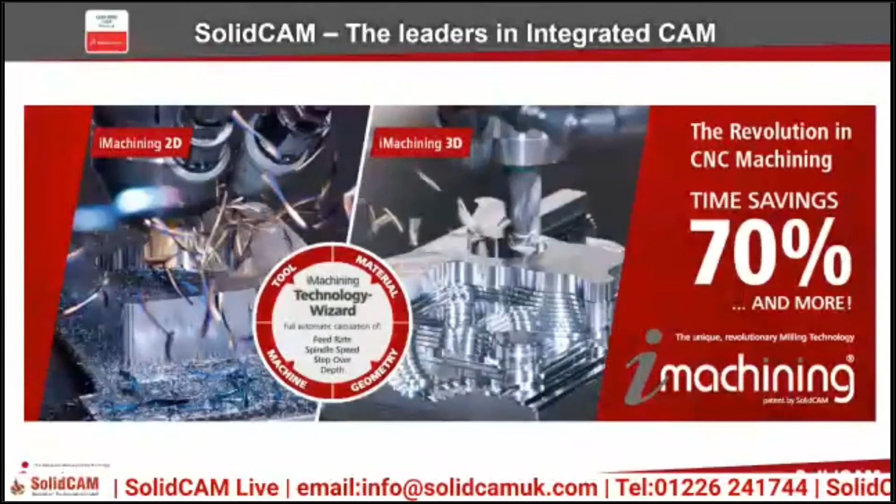So we're first going to have a look at a presentation of SolidCAM. We're going to have a look at the features and benefits of SolidCAM, and we're also going to have a demonstration inside the software as well of the part that's been programmed for today's seminar, how it's been programmed, and then we will cut back to the cameras in the machine to have a look at this being cut live.

So SolidCAM are leaders in integrated CAM. The major benefits of using SolidCAM inside SolidWorks are that we have the same look and feel through a seamless single window integration. There is full associativity inside SolidWorks as well. So any model changes that are made will automatically update the toolpaths in SolidCAM. SolidCAM is working inside the SolidWorks assembly mode to define fixtures, tooling and vices, and we've also been gold partners with SolidWorks for the last 17 years.

We have a complete integrated solution inside SolidWorks. We are a modular system, so we can add the specific modules needed and when needed as well. So you don't have to have all the modules all at once. If you buy a new machine and need extra modules, these can be plugged in afterwards.

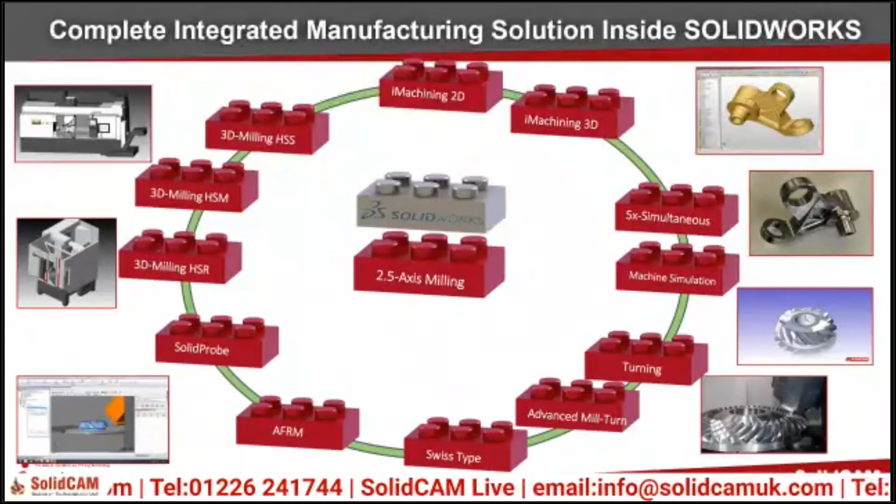Moving on to our iMachining module. So this is our high-speed roughing operation inside SolidCAM with a technology wizard built in as well. So we get increased productivity due to shorter cycle times, up to 70% and more cycle time saving. We dramatically increase the tool life and unmatched hard material machining as well.

We see outstanding performance when using small tools, and we can use iMachining on 4-axis machines, 5-axis machines, mill turn machines as well. High programming productivity and a very short learning curve. The unique wizard will optimize the feeds and speeds for you, including the depth of cut based on the stock and the tool material, as well as the machine specifications. So this takes the headache out of programming these high-speed roughing operations.

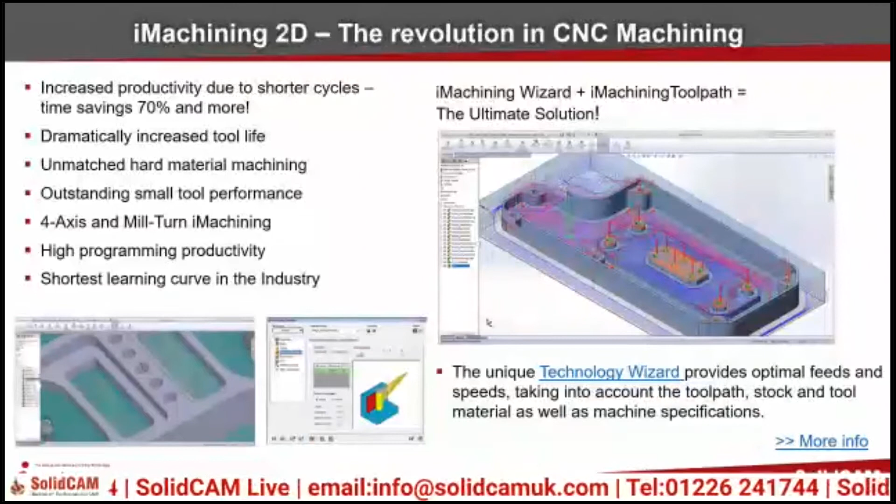So iMachining comes in 2 stages, all built into the same operation. The first stage of iMachining is to create an intelligent toolpath, so an efficient tangential toolpath, which will ensure constant tool load on the machine.

And then the second part of iMachining is the technology wizard. This will calculate the cutting conditions for any given machining operation. So this will calculate things like the speed, the feed, the depth of cut, and also the cutting angles. So we can have variable cutting angles.

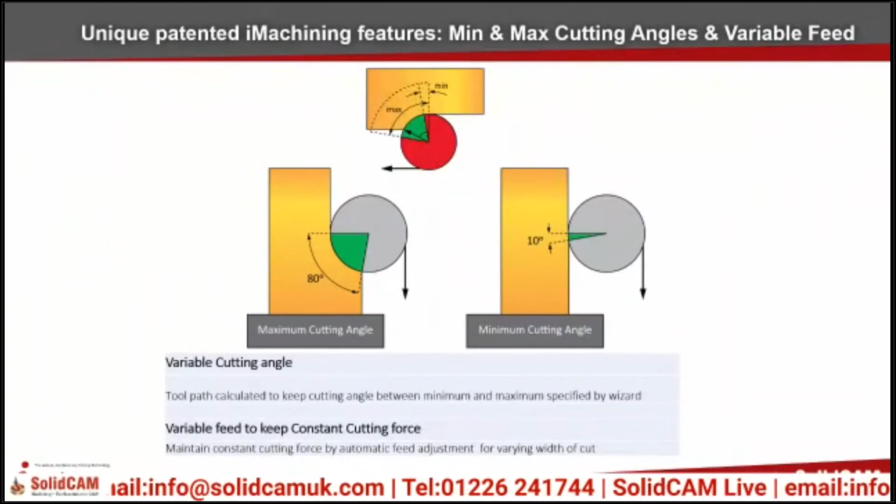You can see there from 80 degrees to 10 degrees, we can set the maximum and minimum cutting angles based on what we wish to achieve, or we can let the wizard handle those maximum and minimum based on the material parameters that it's been given.

Also, the patented unique features inside iMachining are we have the morphing spirals only in iMachining, as you can see there on the left, so with varying width of cut. And on the right-hand side, we have intelligent separation as well for iMachining. So we can separate areas with channels to maximize the spiral area.

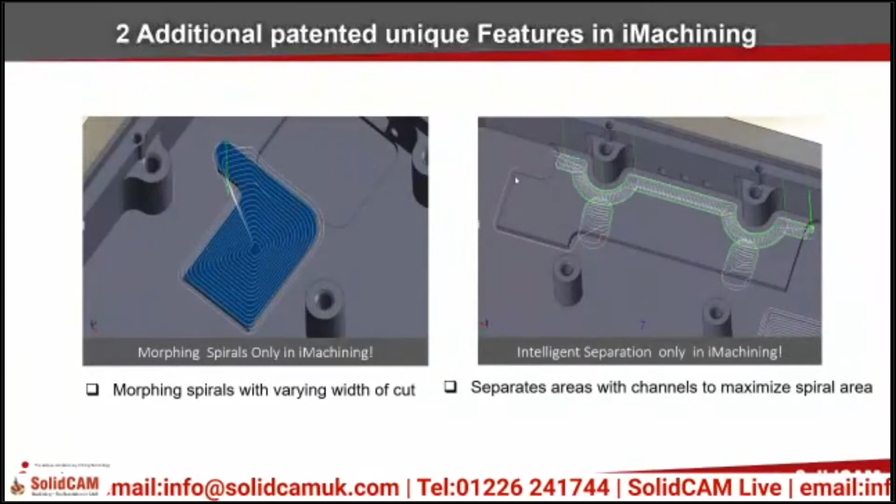So optimal speeds and feeds for iMachining. So the technology wizard will calculate these speeds and feeds for you based on data that we have initially entered. So we would enter the material properties. We obviously select the geometry that we want to machine. We have the tool geometries and we put in the machine parameters.

Now the depth of cut is calculated inside iMachining, and it is calculated on an optimal depth of cut to reduce vibration. We're looking for an ACP close to a whole number. Now, if you look on the left-hand side here, ACP 1, that is one full engagement with the tool. This is minimal vibration. If we look on the right-hand side here, we have many contact points, and we have an ACP of 4.5 as we hit the top, so we have a gap.

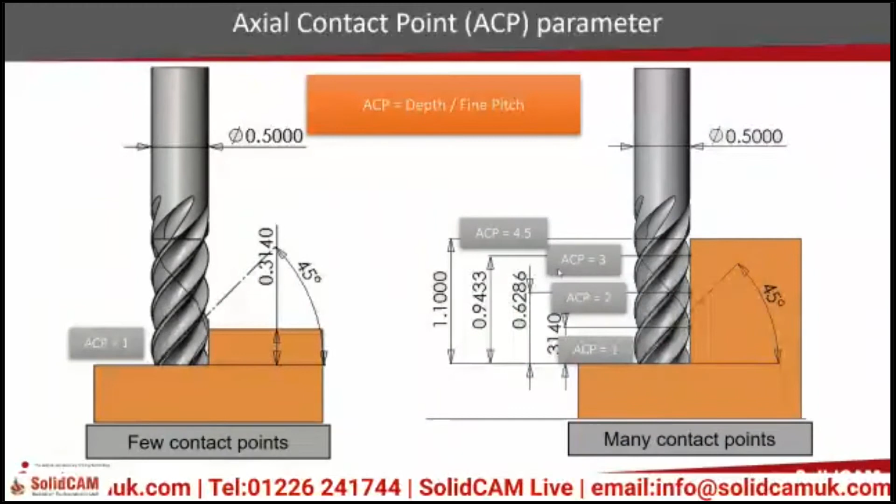Now, this will produce vibration based on the fact that the tool has load and there is a flex point at the top here. With this one here, we're in full contact on the left-hand side here. Now, the cutting forces are only in one direction, to the left. On here, an ACP of 3 would be fine as well. So we're looking for an ACP as close to a whole number as we can. And again, iMachining will calculate this for us.

iMachining is a patented technology. No other system can use our technology. You may see other systems using the spiral or morphing toolpaths, but you won't see any system using a spiral toolpath and also calculating the speeds and feeds and depths of cut using our technology.

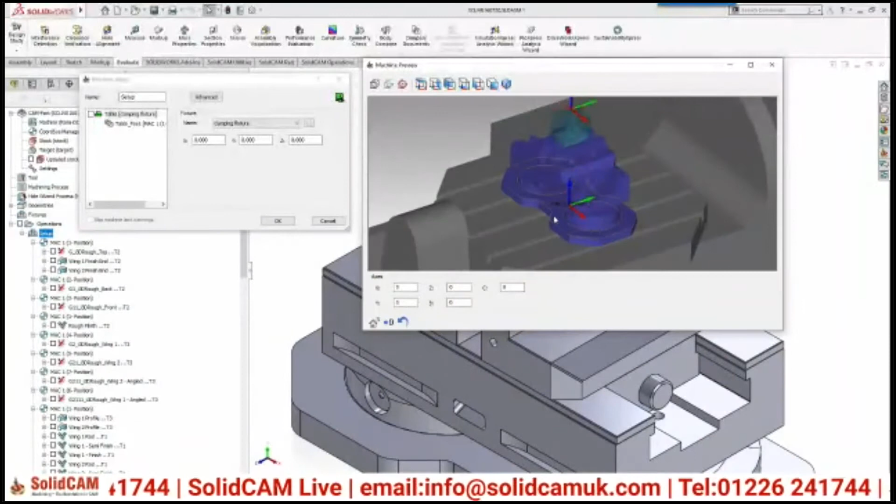So let's have a look at a demonstration of the component that we're actually cutting live on the machine today. So this is the component. As you can see here, this is our setup. And we can see that the component is set up in the vise on the ROMI DCM 620. And we've got the stock in there as well as the part.

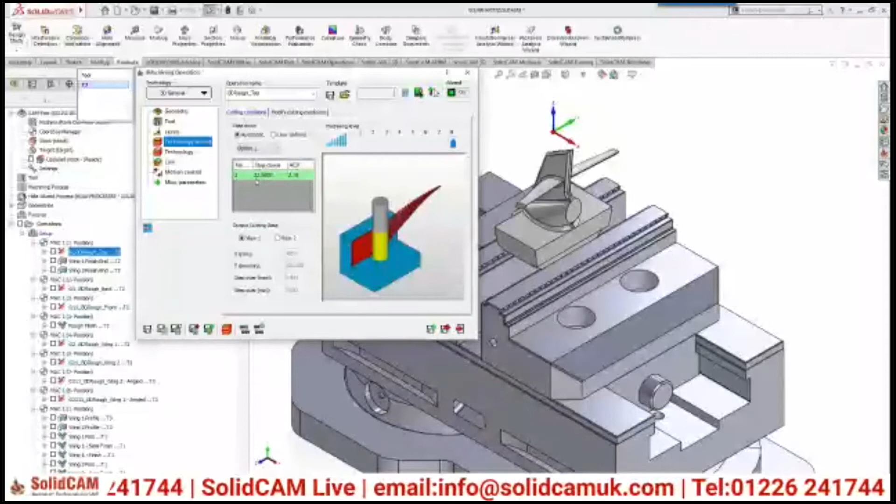And on the iMachining data, we have told it that we're cutting EN24T. This is a premium carbide and the helix angle is 36.5. Now, if we have a look at the technology wizard, this is the ACP here. You can see how it's highlighted in green. So we have an ACP of 2.19, which will minimize vibration.

You can see here the speed, so the meters a minute, we're running at 183. And we can also see that in the feed rate as well. So the maximum feed rate of this toolpath is going to be 5,261 with a step over of 0.5.

Now, the machining level can be adjusted depending on the rigidity of your setup and the application that you're using iMachining for. You can see as we slide the bar for the aggressiveness that the speed and feed will change in tandem.

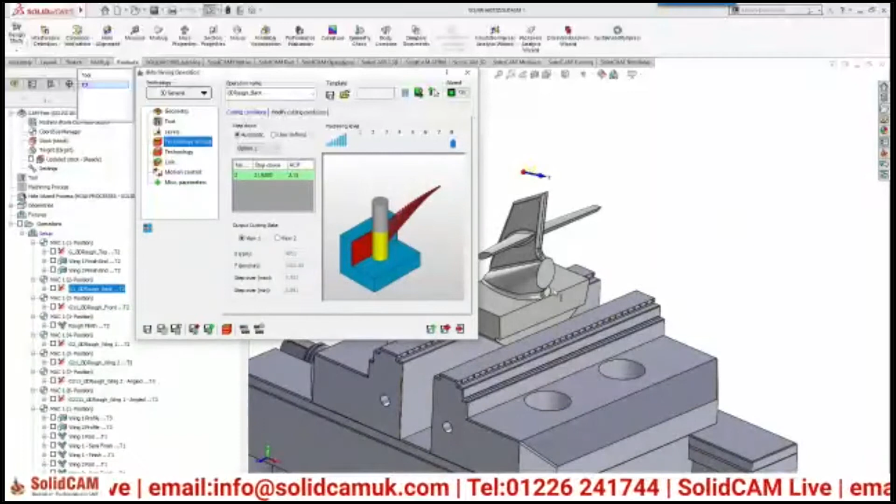This is the tool path. So this tool is roughing halfway down the component. So to minimize the tool stick out, we've got the 5-axis machine. So we're roughing halfway down and then we will tip over and rough the rest at an angle. Those two operations there are just finishing the ends of the wings just while we've got the rigidity in the component and to stop the vibration.

So this is the second iMachining toolpath. You can see this is done from nearly 90 degrees. It's about an 85-degree angle. Again, the ACP is 2.15, so we're in the green. The technology wizard will tell you if you're going to get vibration. You will go into the orange area, which means that there is likely going to be vibration. And then we'll move into the red, where we will get vibration.

As you saw in the presentation, we're using varying cutting angles, which will vary the speed and feed. You can see here that automatically the angles have been selected, which means the required power at the motor is 2.2 kilowatts. Now, if I change the max cutting angle to 20 degrees, for instance, you can see the power required at the motor is now 1.8 and the feed rate has adjusted. So the maximum feed rate has gone up, but the step over has come down.

So again, I'm going to unselect that and leave that as it was and let the technology wizard pick the best suitable cutting angle for this tool.

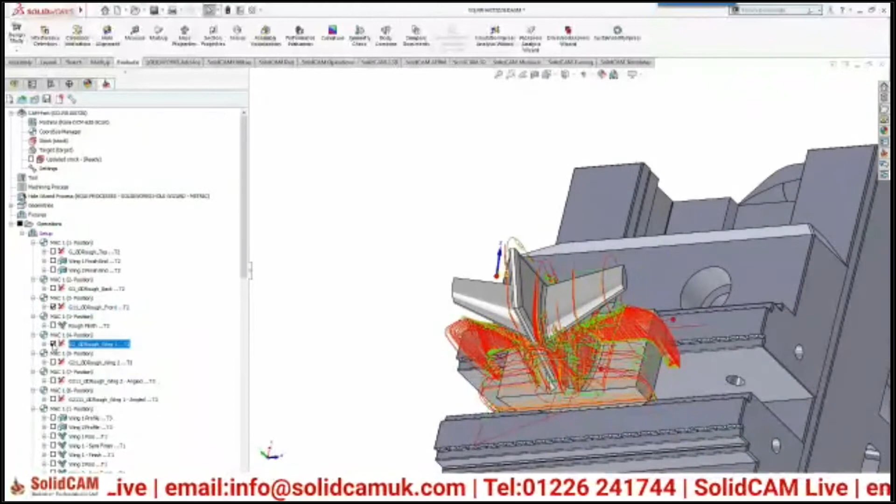Now if we have a look at the next operation, so the next operation is then from the other angle, and then the other four, should I say, iMachining operations are with the 8mm bullnose end mill from ITC. So again, all the iMachining data has been selected.

We're also using a scallop at this point here, so we're rest roughing as well. So we're going full depth of cut with iMachining, and then we're asking it to go back over the component, leaving a 1mm scallop all over in order to give us a rough shape ready for finishing. So you can see those 4 toolpaths on there.

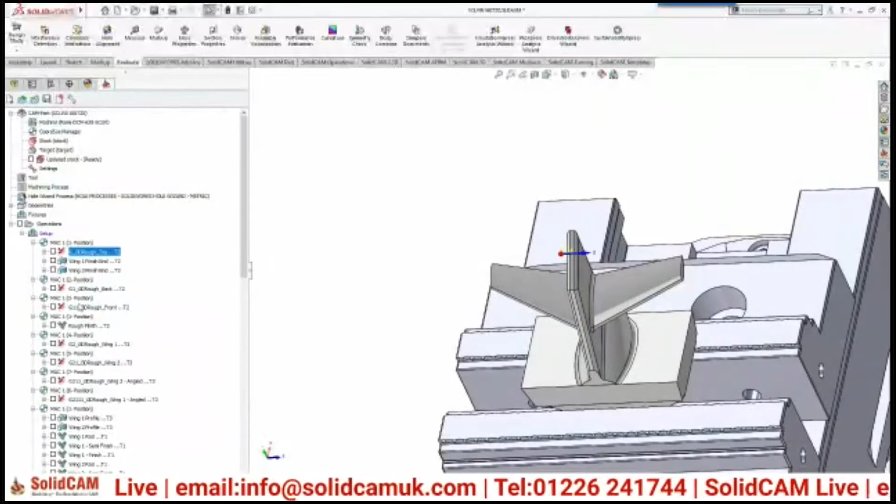I also want to show you the next toolpath as well, which is not a roughing toolpath, but I'm using it to rough the bottom shape of this component out. So I've actually used a 5-axis simultaneous operation here to rough this plinth using the radius on the side of that 12mm cutter. So I've selected these 4 faces around the component to machine using parallel cuts, and I've told it a drive surface offset of 0.25.

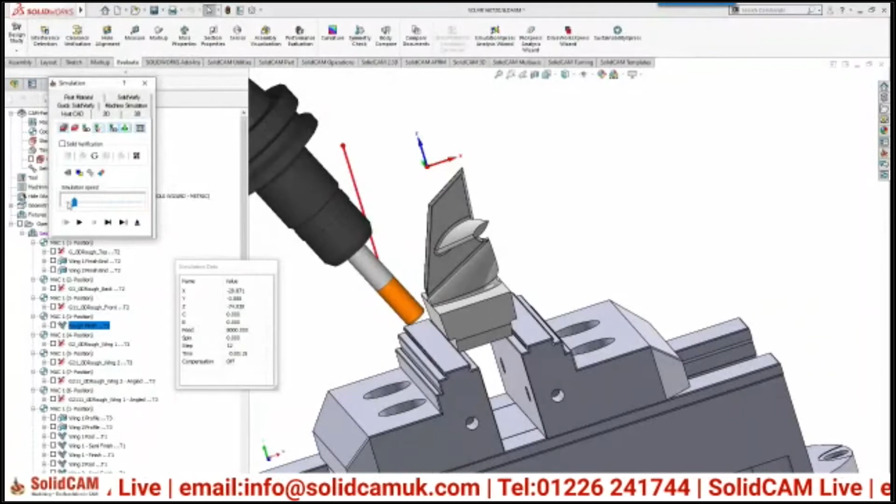If I go and have a look at the strategy, you can see I've selected it to be output in 4-axis mode only, and I've locked the 5th axis at 65 degrees. So I've actually locked the B axis over at 65 degrees, and then we're going to rotate the C axis around. So you can see there, this is the angle of the cutter. So I'm getting contact on the radius here, and I'm just taking cuts all the way around here to rough that to within 0.25, ready for finishing.

So that's just to show you there that there's always more than one way to rough an area on a component. So if we have a look at the simulation here, you can see the live cutting of this job as well. So you can see the simulation shows us what we're cutting on the machine. Now this is iMachining, this is that top component there. Now this is full speed as well, this has not been sped up.

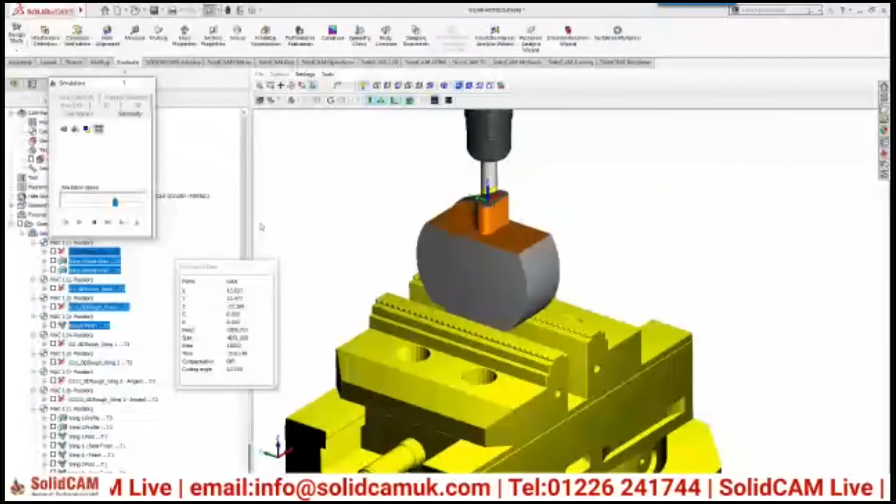The simulation obviously is a little faster than the actual machine cutting, but we can see here it's machining away all of that material. It's using the full flute length, so we're at about 22mm depth of cut here. And what you'll see next as well is the scallop that we put on there. So I told it to leave a 1mm scallop, so you can see it's done all its full depth of cut first, maximizing that tool efficiency, and then it's gone back over the component to do its 1mm depth of

cut. And you can see on the left hand side here it's in cut, iMachining. So again, full depth of cut now on this second cut. You can see it actually working there on the machine, and the simulation's moved on to the other side. It's a little bit in front there.

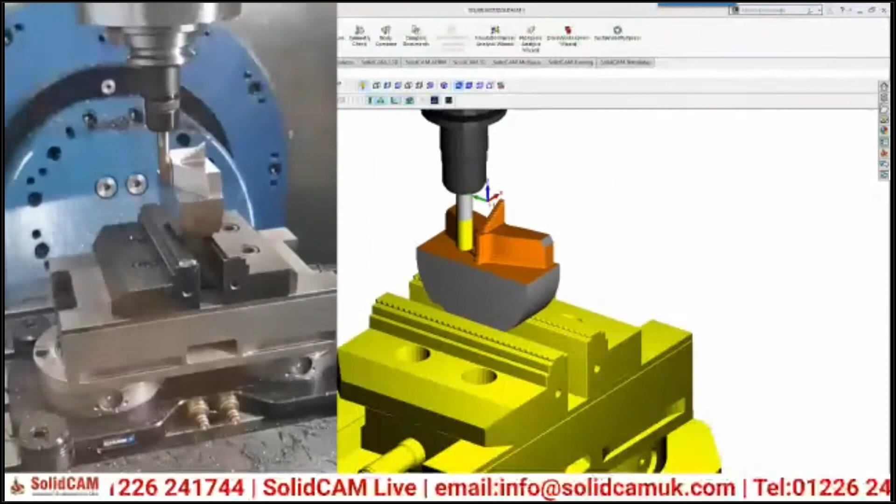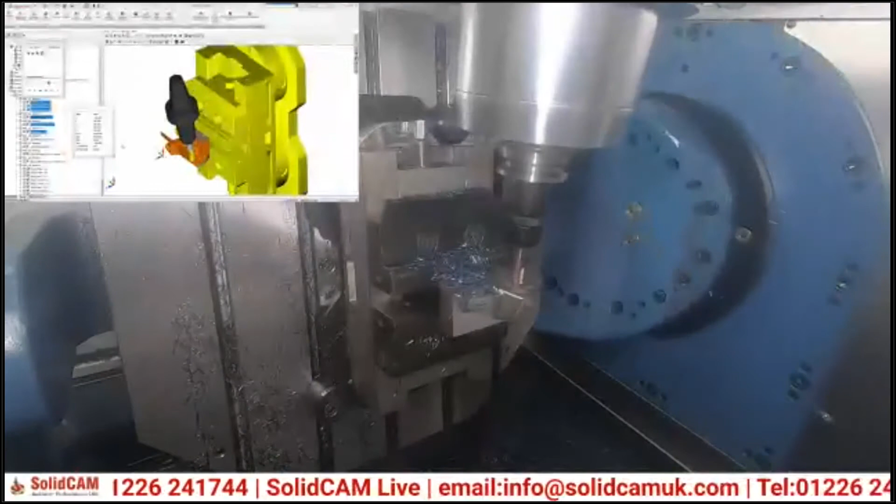If we have a look at a little bit of slow motion here on that back side of that component, you can see iMachining there, peeling the material away. So this is a small step over, high speed and feed with a full depth of cut. And this is now tipped over, so we're roughing out underneath those wings of this component. You can see we're still using the iMachining technology to rough that area out.

You can see here, this is the plinth roughing here. So this is where we used the 5-axis simultaneous to actually produce a roughing cut. So 5-axis can be used for roughing just as well as it can be used for any finishing cuts as well. What we're going to do is we're going to come back to the machine now and go back to the live demonstration, and you'll be able to see this cutting live as it is doing here in this recording.

Yeah, so as you can see in the presentation, it's running all that iMachining there. You can see the live video feed now. You should be able to see that on your screens. You can see it's doing that roughing around that plinth as I showed you with that 5-axis operation. So we've done all the work with the 12mm tool there, roughing out all of that area.

We've had a couple of questions come in as well throughout that presentation. One was, is iMachining beneficial on aluminium? Yes, it is. It's beneficial on any material that you use. So you get greater time savings on a harder material such as titanium, but you still see savings on aluminium as well.

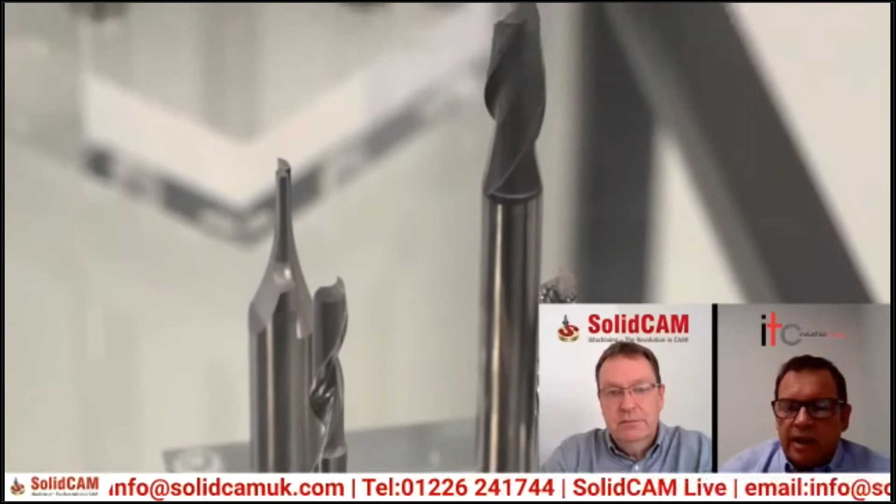Obviously, we decided what size cutters we're going to use, but you've told us what the tools need to be geometry-wise. Can you tell us why you chose those particular tools? Yeah, obviously we've been deciding what methods he was going to use on the live demo, barrel cutting and the trochoidal. I went for the 5021 series, which is predominantly designed for trochoidal milling anyway. We've got a full range of tools that we developed for that. This particular tool is 5 flutes, variable helix, variable pitch, and a coating on. So it's designed specifically for doing that type of milling.

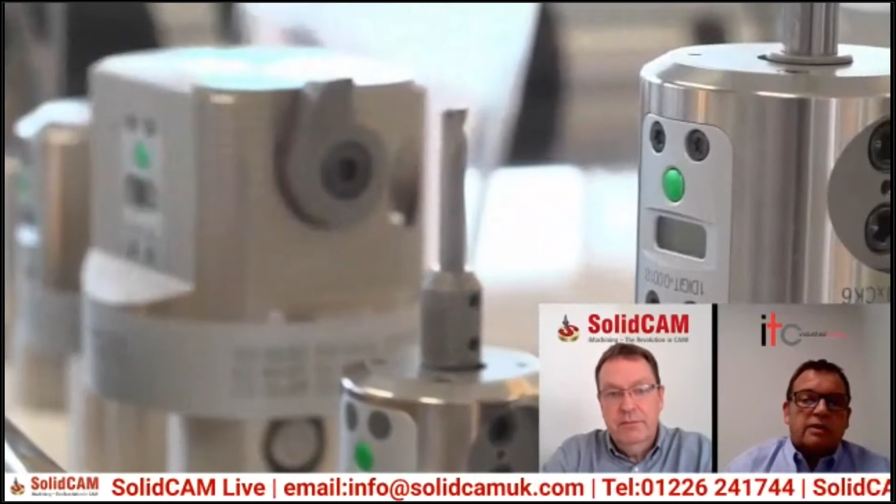Also, we've got another range with chip breakers in now as well, specifically designed for getting rid of swarf where you're using full flute. Got you. And then obviously we've supplied the back end tooling as well. Yeah. So this is a very important part of it when we need to make sure the tooling's running very true. So that's why we've gone with those particular tools. The barrel tool was designed predominantly by Ben, relating to the shape of the part. So then we've gone with that drawing and manufactured that to suit. So that's it really.

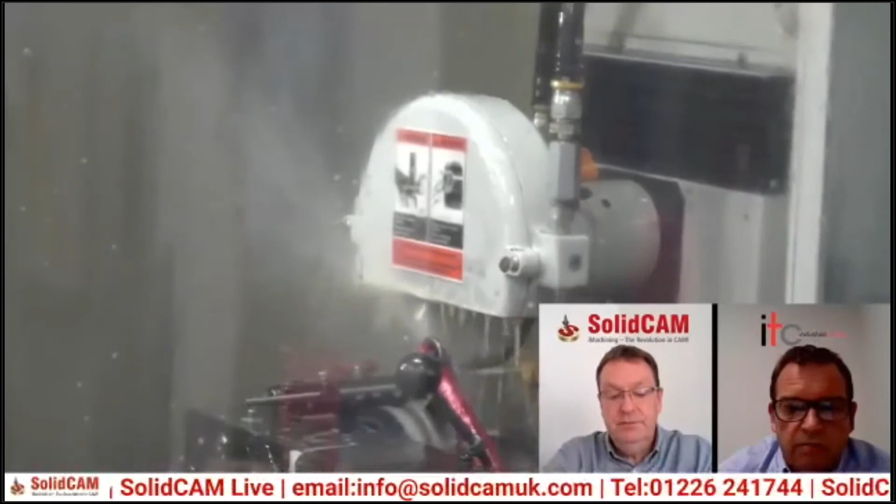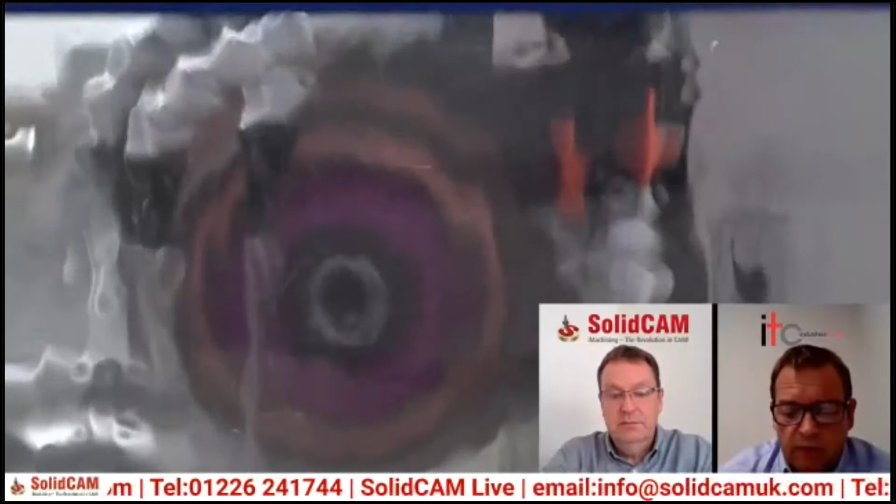We've got new blanking machines that have enabled us to cut out the pinch points in manufacturing. Also, we've got a new diamond wheel grinding and balancing machine, which has obviously cut our times down and saved us costs on the wheels, increased the wheel life for us as well. So those are some of the improvements we've made, along with replacing the older machines with new ones and new

technology. And we've recently just released a new app, which is available on Android and iPhone, which enables customers now to purchase direct from the app. Right. So yeah, we're trying to keep up with everything.

You know? Yeah. I mean, obviously, we believe SolidCAM is one of the best CAM software solutions out there, and we could have used, you know, numerous solid carbide providers. Why do you think we should have chosen ITC? Well, I think the thing about ITC is we're a solution-based company, not just a manufacturer. We've got engineers, sales engineers that work all over the country, and they're all from a shop floor background. So they're all capable of standing with the operators on the machines and doing the job.

And that's a big part of it. You know, it's all about the solution as well. And we've also got a team in the office that can answer questions, technical questions as well. So one of the biggest parts of it is obviously making sure that you can cut time out of the job, because it's not just about the price of the carbide.

You need to be able to offer a solution where you need to be able to look at what the customer's doing and how he's using that tool, the methods, the whole package, rather than just saying, look, it is an end mill, because that's the whole point of it. We've got to be able to reduce those costs, and it's not just by the tool, it's by the methods and offering a solution.

You mentioned it previously about the importance of tool holders. Can you just explain that a little bit further for us? Yeah, the tool holder side of it is a very big part of the whole package. You've obviously got a very expensive machine, really good quality tools, and you want to put the interface between them in the middle of it and make it work really, really well. Yeah. Now, there's a lot of cheap stuff on the market.

You know, there's a place for everything, but some of the cheaper end collets will have a 15 micron runout, and that makes the tool oscillate rather than run on its center, which has an effect on each flute cutting properly on the job, and that affects tool life, surface finish, vibration, everything. So if you put a good back end quality tool in there, like the

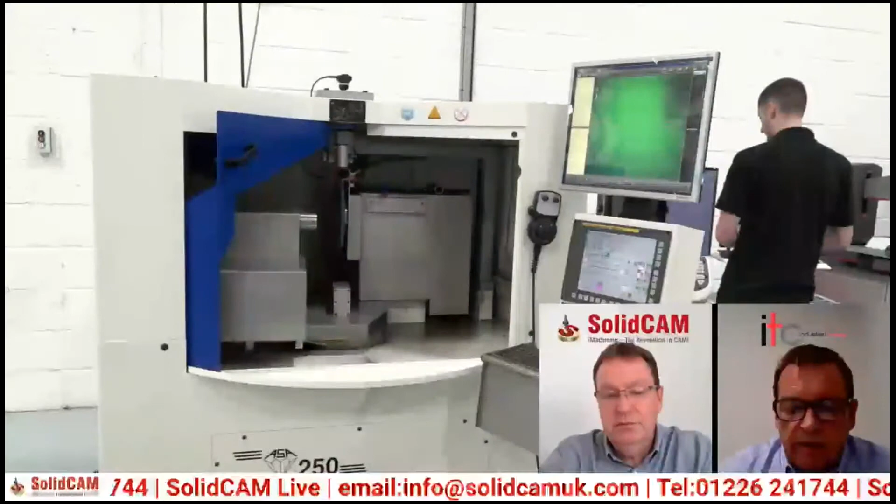Cool. At the moment, most customers want as few suppliers as possible. So other than your own products and spindle tooling, is there anything else that ITC offers? Yeah, we currently are the UK distributors for WIDIA products, where we have the indexable tooling inserts, we have lathe tooling. As I said, we supply the Big Kaiser product, which includes the back end tooling, boring bar systems, again, tooling for lathes, milling machines. So we've got a very wide range of products along with the ITC products as well.

We also are the UK distributor for BASS taps as well, although we do have our own program for thread milling and taps. So yeah, again, the Big Kaiser stuff, the boring equipment that they do is fantastic. We've had some really good results with that. There's a new automatic adjusting boring system that hopefully we want to demonstrate with you guys at SolidCAM later this year. So yeah, I'm sure that's something we can do at a later date.

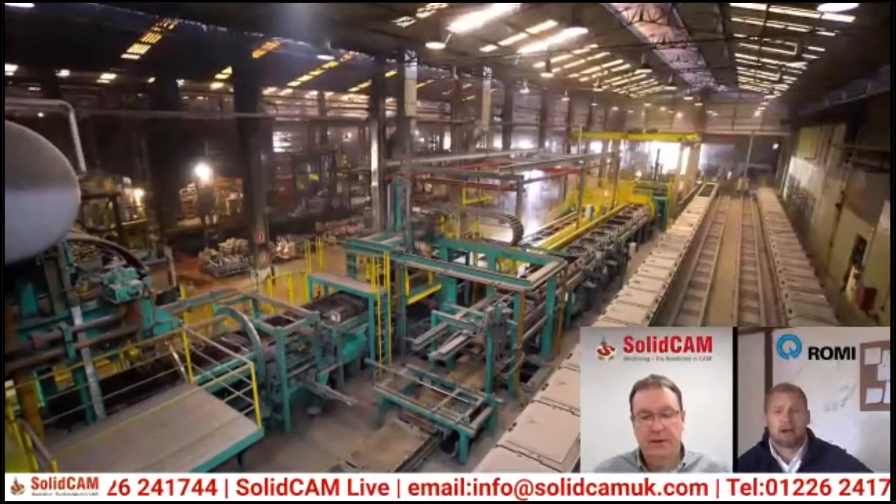Secondly would be Burkhardt and Weber, which are a manufacturer based in Germany that we bought some years ago, that manufacture very large, high precision and sometimes customized machines, largely for power and energy industries and sectors such as that. And the third is our rough and machined castings, cast iron parts facility, which is part of our castings foundry. Okay, that's great.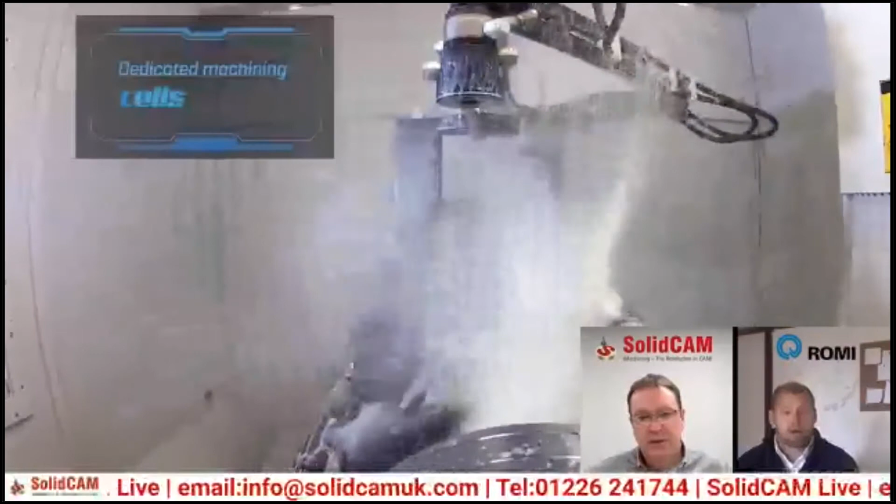Obviously, everybody's been impacted over the past 3 months with the coronavirus. How has ROMI fared as a company, and how has it affected you? Well, from the Brazilian perspective, at the moment, it's odd really, because in the last quarter of 2019, it was a substantial increase on the year before, and we fully expected the coronavirus to really put a big dent in that.

But thus far, it really hasn't. The Brazilians are quite a bit more affected than we are, but they haven't seen the impact of that on the bottom line as yet.

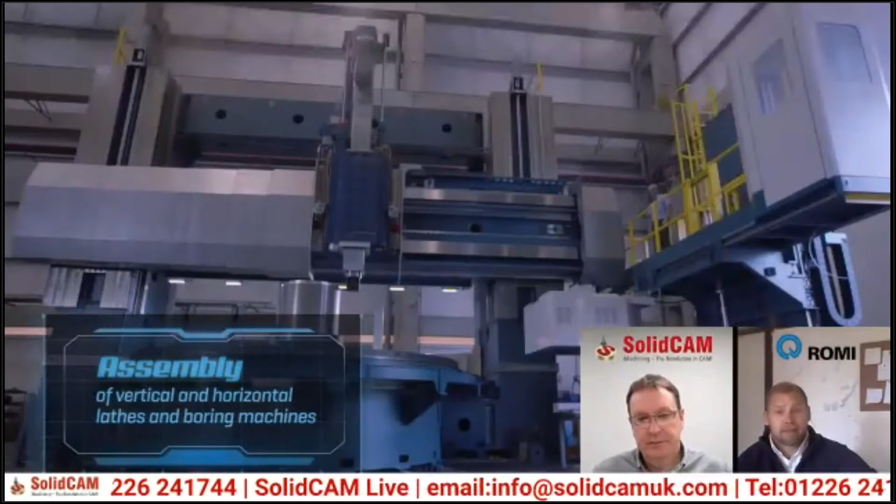In the UK, from a personal perspective, it's been an absolute roller coaster. From the initial impact and the fear surrounding the whole industry in the UK, to a sudden influx of short-term inquiries, which has resulted in a number of orders, possibly more in the last month than we had in the first 2 or 3 months of this year. So I can't say exactly why that's happened, but it's a testament to our customers and UK manufacturing as a whole that they're prepared to make these investments.

Absolutely. We've noticed the roller coaster you just mentioned. Obviously, we're quite keen to work with industry partners and gain the benefits of those different marketplaces. How do you find working with SolidCAM as a partner? What do you get out of that?

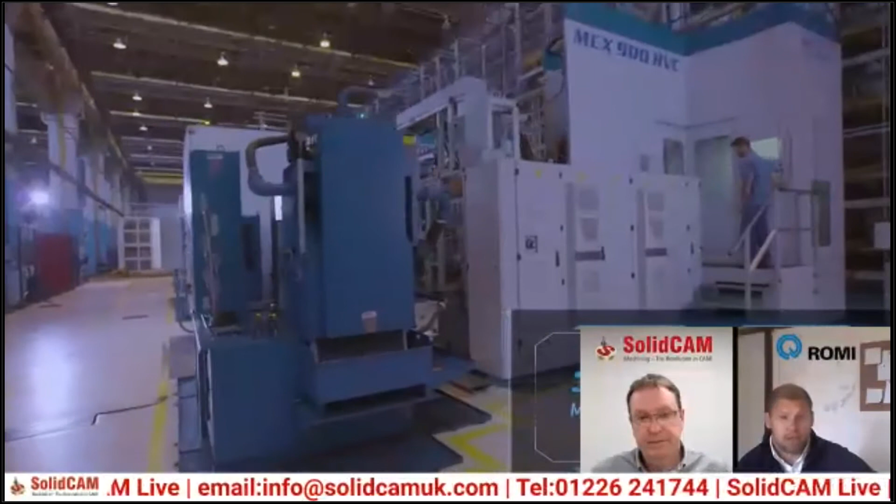Well, firstly, from a completely selfish perspective, it's a second showroom for us. We're obviously based in Rugby, right in the middle of the country. So to have a showroom in the north is invaluable, with an increasing array of machine tools, from small tool room lathes to the CNC turning centres, right up to your brand new 5-axis machine. So from that perspective, it's invaluable.

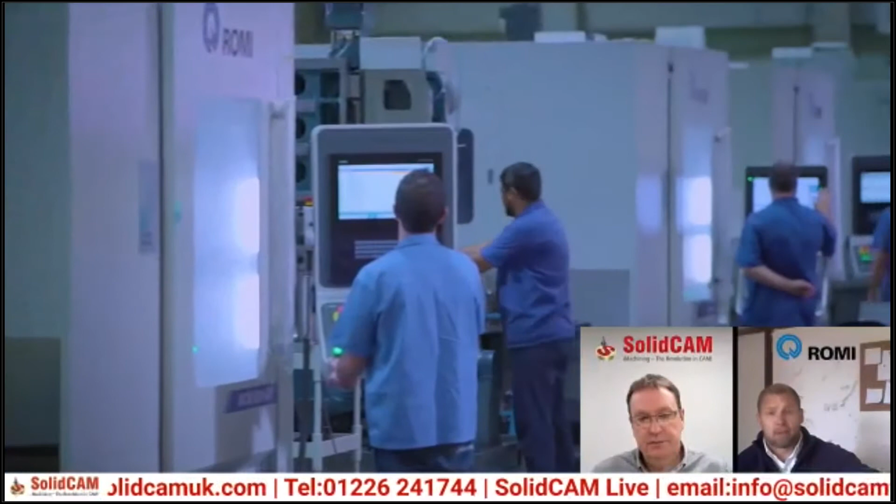But also the events that you put on, we try and emulate ourselves. Far more centred around the sharing of knowledge between us as a machine tool supplier, the software that goes with it, the CAD and CAM, along with tooling suppliers and metrology partners. SolidCAM do an excellent job, not only for customers as such, but people who are just interested in the business and afflicted with that engineering nerdy side. They come away from it knowing a lot more than they went in.

Yeah, absolutely. I find that being able to work with industry partners allows us to offer a greater scope of knowledge, and the collaboration that we're able to offer makes it invaluable to, like you say, prospects and people who are just interested in engineering.

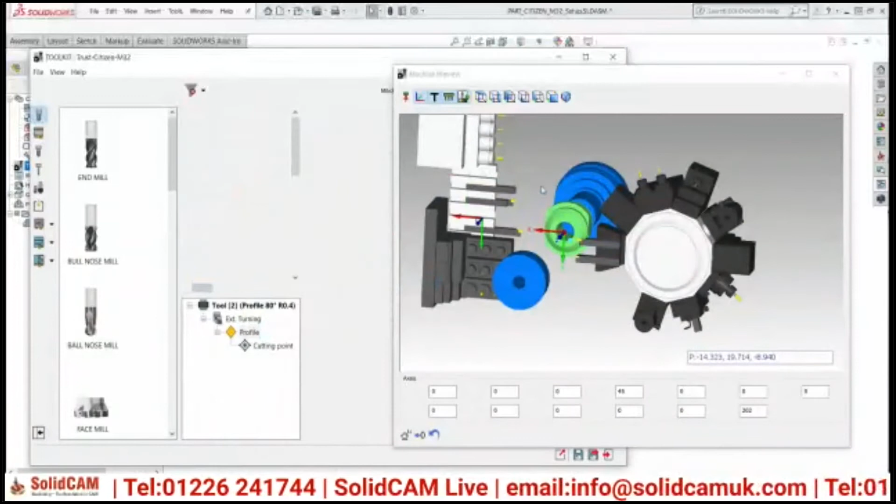SolidCAM support for Swiss turn is both comprehensive and simple to use. In this overview, we will be demonstrating this on a Citizen M32 machine. This machine is a 3-channel machine with 5-axis capabilities, multiple machining patterns and superimposition. All of these features are fully supported in SolidCAM with full machine simulation. SolidCAM supports all tool holder types, including multi-station tool holders for both milling and turning tools. Tools can be moved to different stations and dynamically viewed to make sure the tools are set to the optimum position. Programming of operations is exactly the same as it would be for any mill turn machine in SolidCAM.

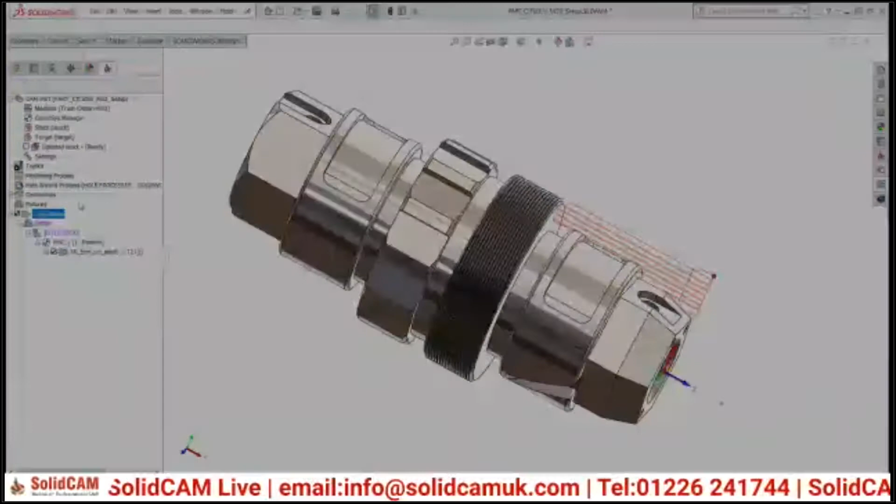Here we are selecting the area to turn directly from the model and the tool from the library. The toolpath is then calculated with full support of cycles on the machine. As with all operations, this can be viewed and simulated as the machine will cut it. Even adding more complex machining strategies such as cylindrical milling is kept simple. Select the area to machine direct from the model, the tool, and SolidCAM does the rest.

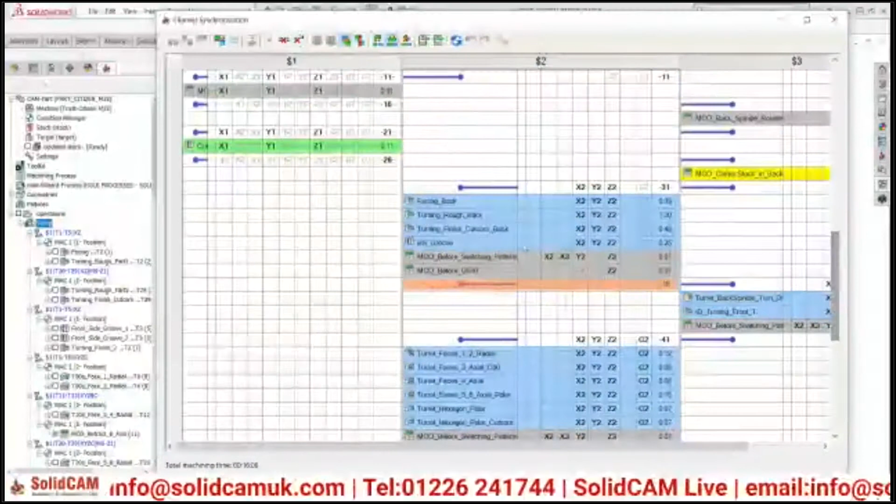Once the programming is complete, the channels can be optimized to get the best cycle time on the machine. Currently, the part is programmed as a single part, but in reality, we want to be working simultaneously on both spindles. This is done by selecting the operation to start machining on the second spindle. Now we can see the operations working together in all three channels. Based on this, SolidCAM will automatically choose appropriate machining patterns which can be reviewed and changed by the programmer, as in some cases alternate patterns are available. The programmer has full control over the positioning of the wait codes, and SolidCAM will assist this by dynamically checking and advising any issues.

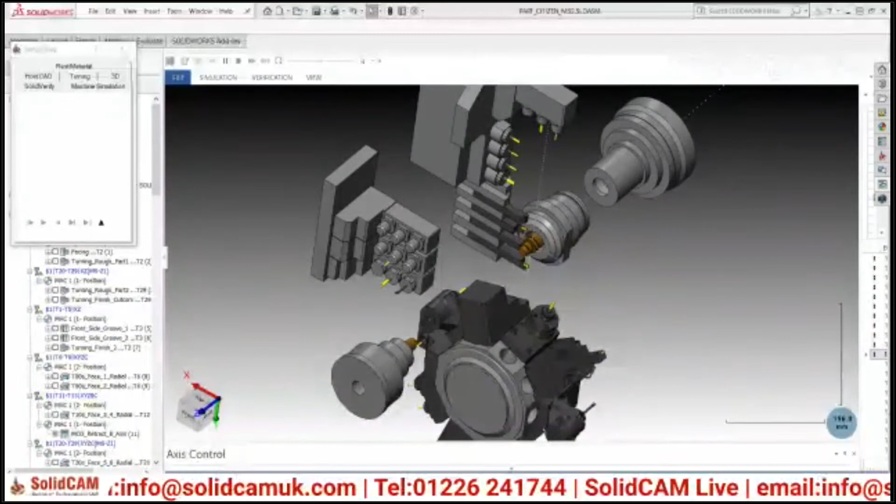Now the complete program can be simulated as it will be cut on the machine with all axes working together. This highlights any potential collisions and will show any superimposition moves programmed, giving confidence the program is correct before being passed to the machine. This can significantly reduce machine downtime. Once this has been proven successfully, the G-code can be created in a single click. And here we see the result displayed in our SyncManager software, clearly displaying wait marks and axis patterns.

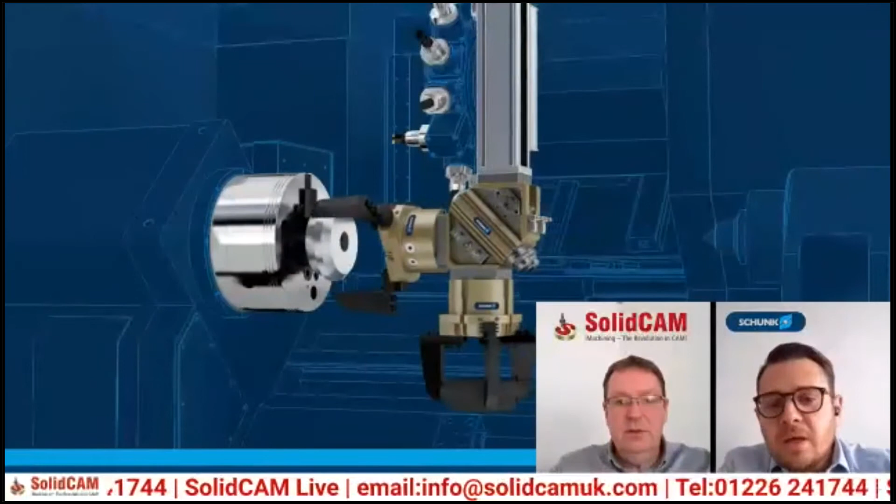So yeah, on the zero points, I think, first of all, it's one of the best kept secrets in the industry. It's amazing how little it is used in the UK. We see a lot of usage of zero point systems in Germany, and it's something that for us is a no-brainer. So essentially, the zero point is a setup killer, right? So you can externalize your setup or do everything offline. So you would have a space for you to work outside the machine. So while the machine is working, you will preset your next job.

Then, as soon as the machine stops, you can just release the air, add air into the zero point system. That will release the part, you take it out, drop it in again, and the changeover is done within seconds, 5 to 10 seconds stops.

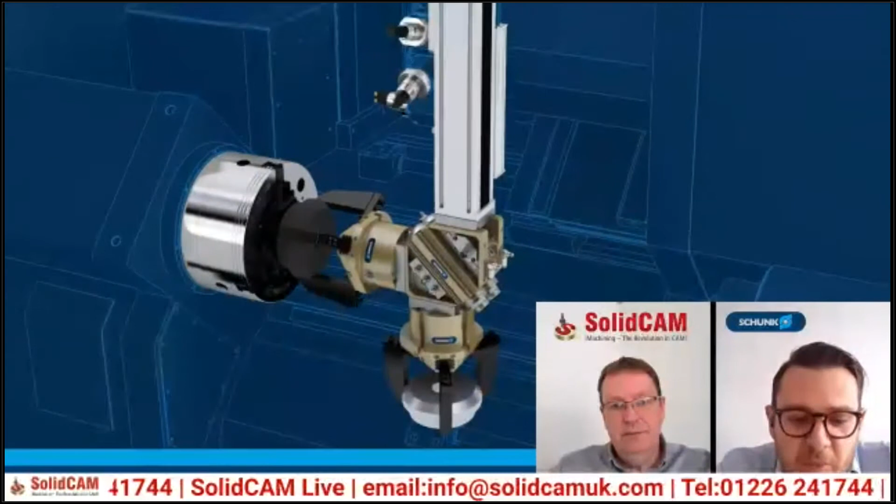People tend to think of the zero point as, oh, but I need to have a lot of production or a serialized type of production. I do lots of one-offs. That doesn't really suit me. Actually, it's quite the opposite. The more changeovers you have to have, no matter if they are the same job or different jobs, the more the zero point will assist you.

Right. And in terms of precision, we're using these today on this presentation for aerospace. The repeatability and the precision of the zero point is second to none. Our system offers a repeatability of 3 microns. So it's really a set it and forget it kind of system. It's a suit-every-single-application kind of solution.

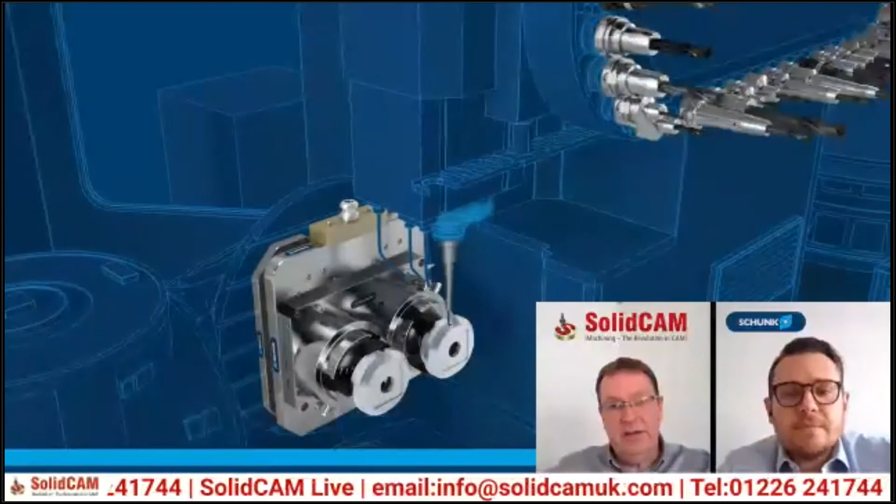Right. Okay. And obviously we're using the zero point on the 5-axis, and on top of that we're using one of your vices as well. Can you tell us a little bit more about the types of vices, please? Yeah, we have a complete range of vices. Today we're using a mechanical vice, which you could think, well, what's the difference in mechanical vices? They're all the same, right? So let's just get the cheapest one. Not quite. So our vice is fully shielded.

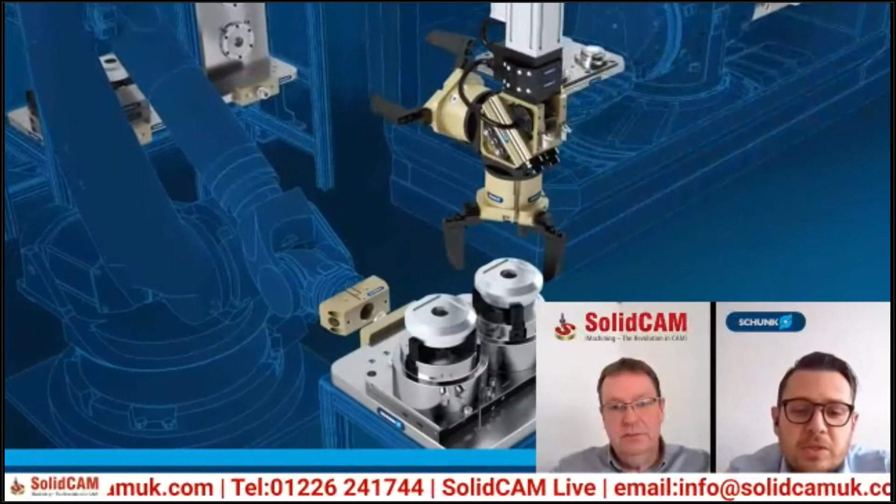The mechanism we use prevents any kind of contamination inside the vice. So again, that saves a lot on the setup. You don't have to clean the vice every now and again. You will never have a problem in that sense. The other point is every single mechanical system has a tolerance, a variance. So you clamp the thing, and the part will either swing each way.

Okay. Most of the vices out there, if not all of them, that tolerance can be variable to one or the other side of the vice. Our vice has a consistent variation to one side. So although it does have a tolerance, that is absolutely repeatable. So you can accommodate that in your process and eliminate any variance in your process. That is incredibly important when you're doing something as precise as what we're doing here today.

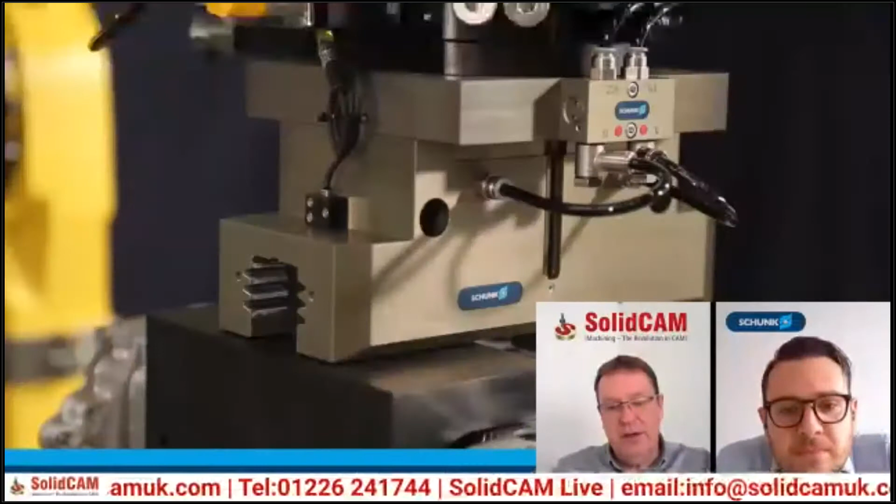Okay. Just going back to your point about the zero point fittings, one of the questions that has been asked is how much pressure do you need to actually release the clamps within the zero point? There isn't that much requirement in the way of air pressure, is there? It runs on a 6-bar system, so it's normally the system you already have installed with any CNC machine.

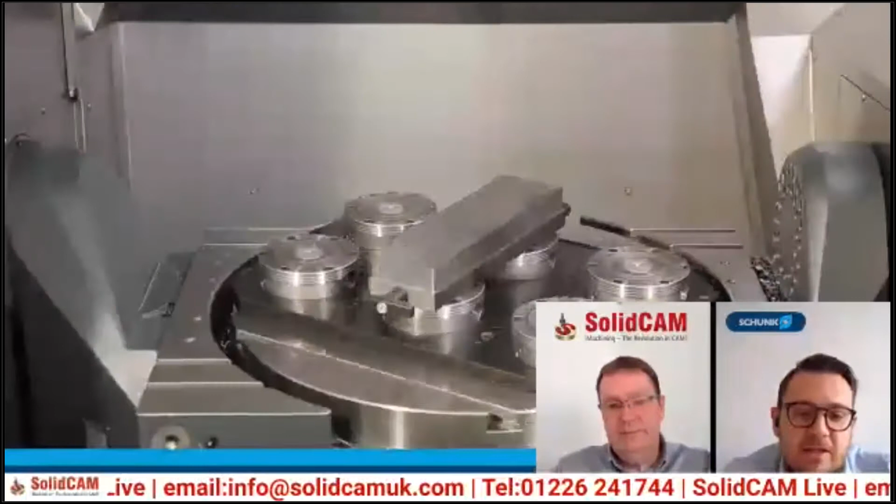It's available to every CNC machine. And another important point to bring up now is that it doesn't operate while it's energized. So you need to bring the air to release the system. Yeah. Air to unlock. So you just have a normal 6-bar line system around your machine.

You bring a pipe, connect that to the system. That will unlock it. You take the part out. You drop the new part on, pull the pipe out of the system, and it's locked in again. Yeah. And so no matter what happens, the part is always going to stay in place.

Yeah. Obviously we've been using it for quite a while, and one of the things I did notice, and I think we brought this up at the last seminar, was that if you want to make sure you get a good hold of it, it automatically clamps as soon as you release the air. There is also a secondary clamping so that you can actually push air behind the clamps as well, isn't there?

Yeah, so the turbo system is a clever valve system. The standard one will give you plenty of clamping force, but you can up that to 48 kilonewton with the turbo system, which again is just doubling the air system, and again it doesn't need to be energized. So it will lock itself in position, and once the air comes out, it's locked in with the extra pressure on it.

Yeah. That's absolutely brilliant. Like I say, we use it all the time, and we find it's a fantastic system. So I'm very grateful for you to spend the time with us this morning. I'm sure that the event's going to be a great success, and that's partly down to the partners that we're dealing with. So once again, thank you very much, Marcel, and look forward to catching up with you soon. Brilliant.

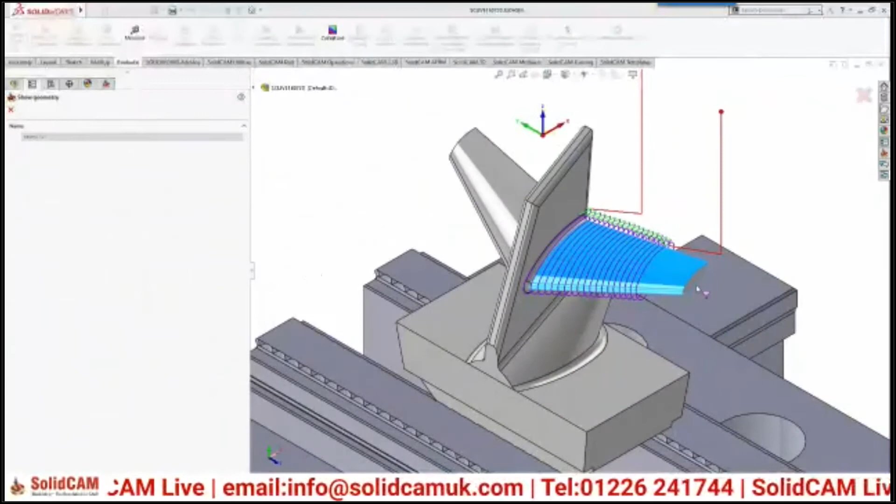So I'm using the 5-axis simultaneous milling operation from SolidCAM. I'm using the morph between two boundary curves in this particular operation. I've selected these surfaces as my drive surface. My first edge curve is the top of the wing, and my second edge curve is the bottom of the wing.

If we have a look at the step down, you can see I have a 2.5mm step down on this operation. And to show the tool with that step down, we have the barrel tool from ITC, which is the 100 radius barrel shape with a 1.5mm radius at the bottom. So effectively a 3mm ball nose at the bottom.

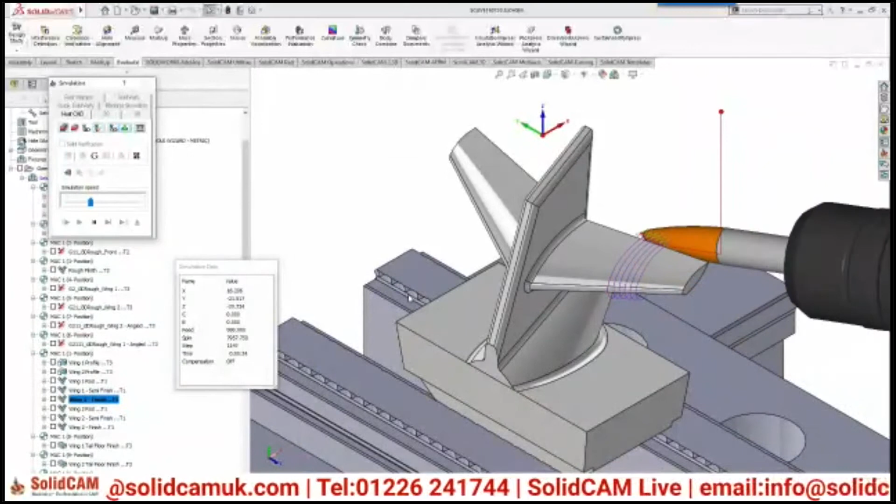So if I simulate this operation for you, you'll be able to see the tool finishing that wing. So full contact with the barrel tool. Now I've used that barrel tool mainly for all of the finishing on this part here. The next one I want to show you is the floor. So finishing the floor with that barrel tool as well.

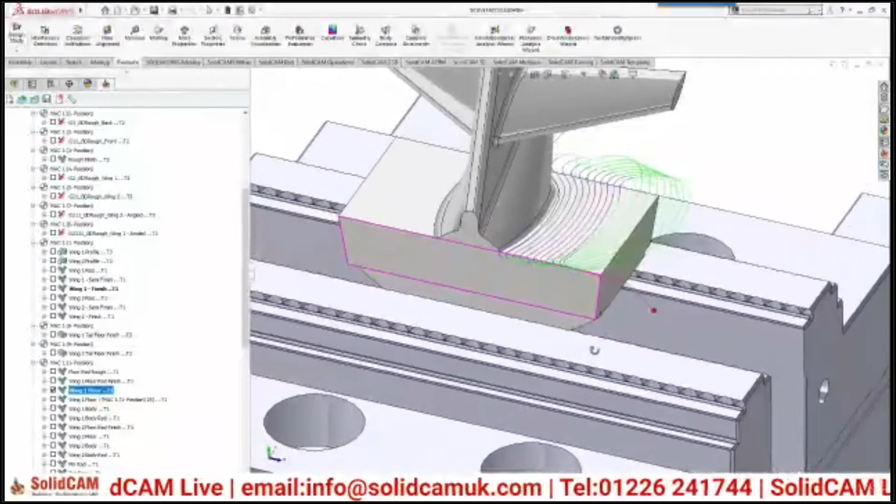So for the purpose of access, getting under there with a flat tool or an end mill using the side and swarfing it or profiling that from the side, you would have to have the table at 90 degrees, meaning that there's a chance then that the table is going to collide with the head. So to keep the tool tilted, we're using a barrel tool again.

This time again, I'm using the simultaneous 5-axis operation, and this time I'm using the parallel to curve strategy. So this time I've selected this floor here, and then I've selected this curve to drive along. Again, the same step down, or 2.3mm step down this time instead of 2.5.

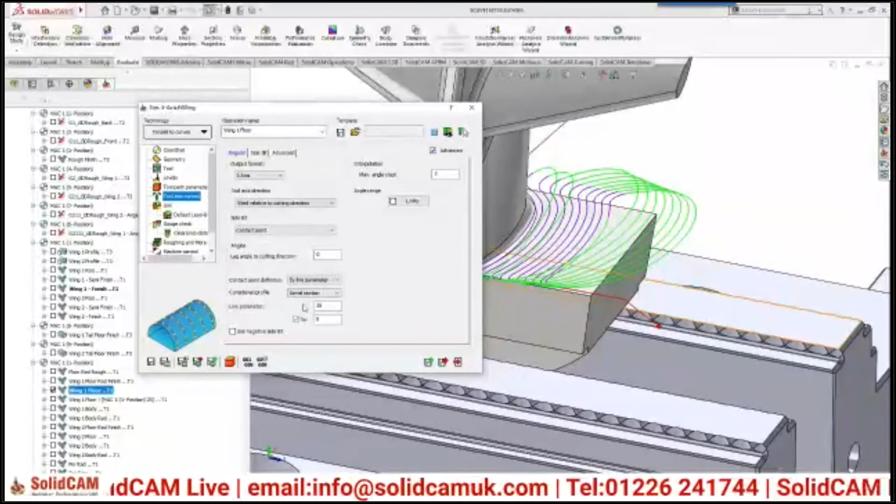And on the tool axis control, I'm actually controlling the contact point of the barrel cutter. So instead of tilting at one fixed angle and contacting in the same place on the barrel profile, what I'm doing is changing the contact point to barrel section, between 30% and 0% up the barrel profile. So you can see here the little image there. So 0% being at the bottom of the barrel profile and 100% being at the top.

So as we simulate this, if we have a look on the side view so that you can see the contact, you can see there that the contact on the barrel is up at that 30% mark where I've set it in the operation. If we just speed that up so that we go down that profile, and again you'll notice that it's going in one direction, so we are climb milling with this barrel cutter.

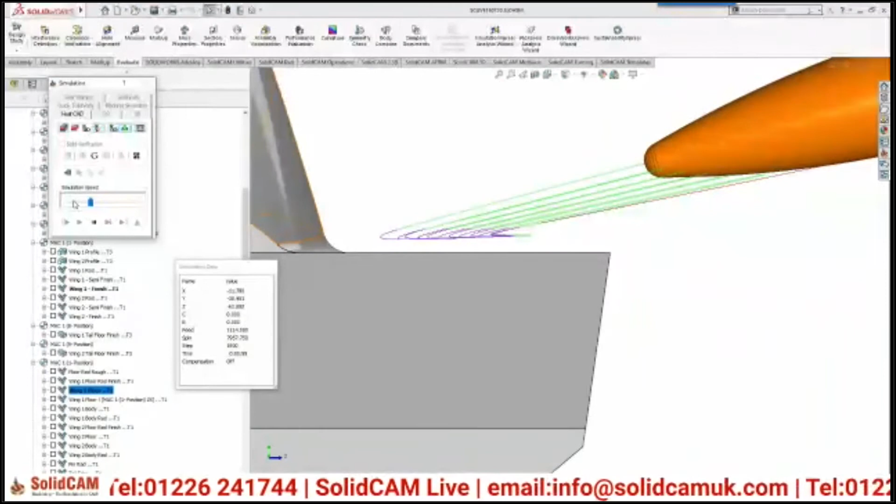Now if we look at the contact point now, as we go further down, you can see the contact point has changed. So now we're further down the barrel section, and by the time we get to the bottom, we'll see it at the 0 contact position, which is right on the end of that barrel section. So again, even though this is an oval form tool or a radius tool on the outside there, we still need to respect the climb milling direction.

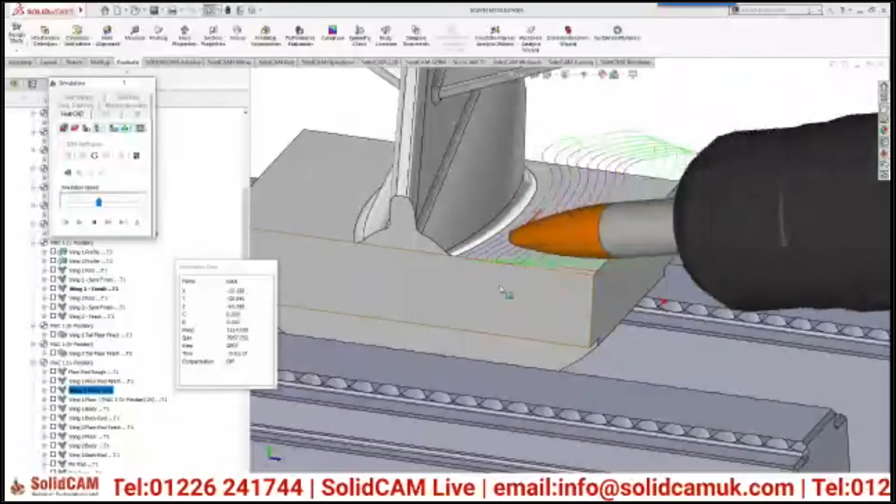Now, another operation on here is using a barrel tool for finishing this simple flat face here. Again, for the purpose of access and being able to tip the tool, we're finishing this with the barrel tool. If I have a look at this strategy, this is again a 5-axis simultaneous milling operation. This time I've chosen parallel cuts, which means I only need to select a face to cut. So I've selected this one face, no other selections have been made. And again, the same applies.

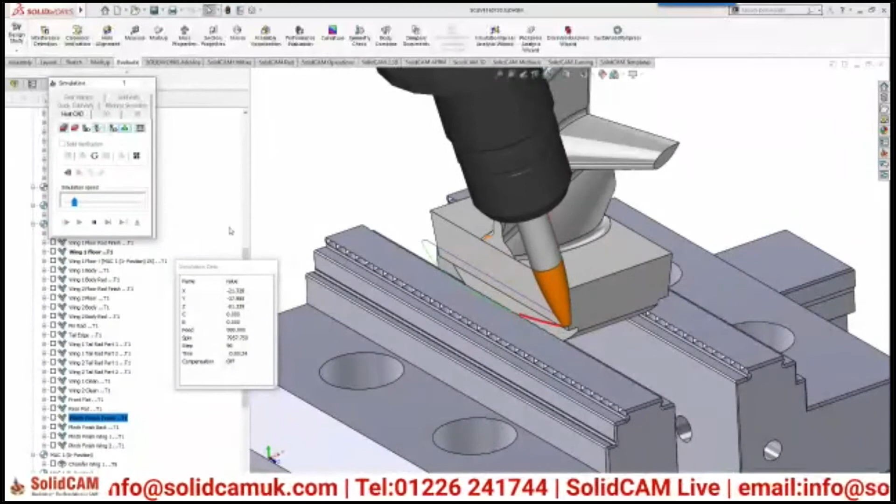We're using the barrel section and we're altering the contact point as we go down that profile. Not only does that mean we get a greater tilt as we go down, we're also having even wear along that barrel section. So instead of just using one contact point all the time and wearing one area of the tool, we're using the full profile of that tool.

Now, moving on to mirror machining. I'm going to show you this on a 5-axis toolpath, for instance, the wings on here. We've done one wing, and as you can see, I've got an operation here that does wing number 2. The way that I created this operation, wing number 2, is simply by right-clicking and mirror, and a new operation mirrored about the ZX plane using the same coordinate system.

It will recalculate the toolpath, and I now have a second toolpath that I can simply go in and rename as my wing 2 toolpath. So that's how easy the SolidCAM mirror function is. That can be applied on any operation.

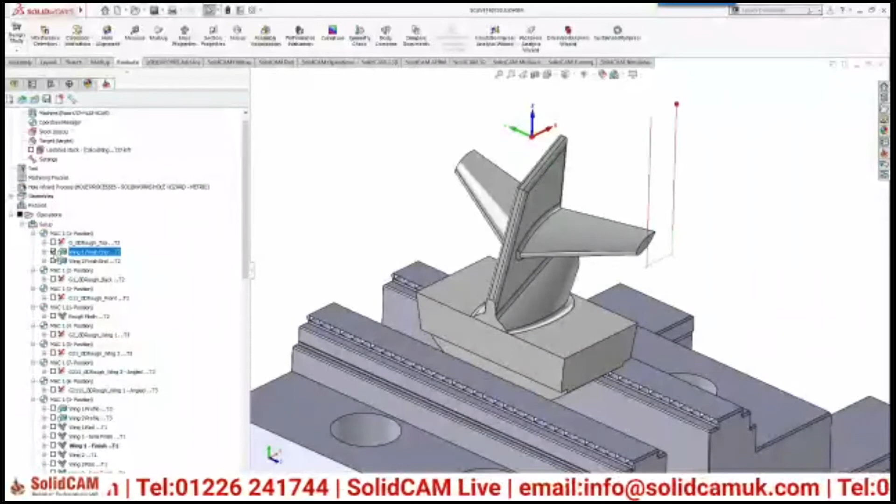You can see here I have the profiling of the end of the wing, and notice that we are climb milling. The red dot is always the start position of the tool. So we start at this side and we climb mill along that wing profile. And to show you, if I mirror this operation again about the ZX, you'll see that the climb milling direction is respected automatically. So we now start at this side of the wing and we climb mill up the end.

So that was the presentation regarding simultaneous 5-axis. A question came through just as I was explaining that: does mirror toolpath respect climb milling? As you saw there, yes, it does respect the climb milling direction. You don't need to do anything, don't need to go in and edit the operation. It will just climb mill on the mirrored toolpath, so it respects the same direction.

As well as mirror toolpath, we have got optimized translation functions, so you can translate in the X and Y. We can rotate around 4th axis. Same on a lathe with live tooling on a C-axis. We can machine at one point on the C-axis, and then we can simply repeat that around the diameter quite easily and quite quickly, with the same functionality as that mirror toolpath.

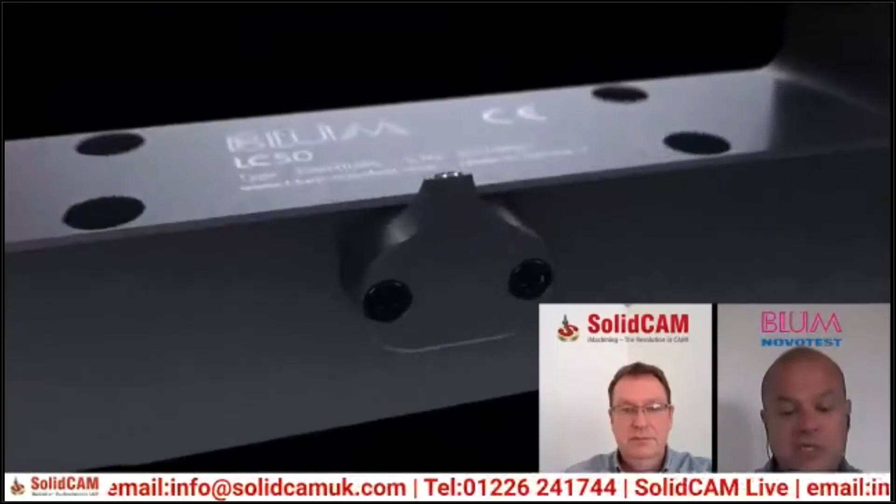The LC50 Digilog uses a new focused laser beam with 30% reduced diameter, which is optimized to ensure that the measurements being taken are more accurate and repeatable, as well as reducing the influence of coolant mist inside the machine tool. This system utilizes both a digital trigger signal to measure the cutting tool and then an analog system with around 300,000 values being taken through progressive shading of the beam. This provides a highly detailed and faster assessment of the cutting tool with nano repeatability.

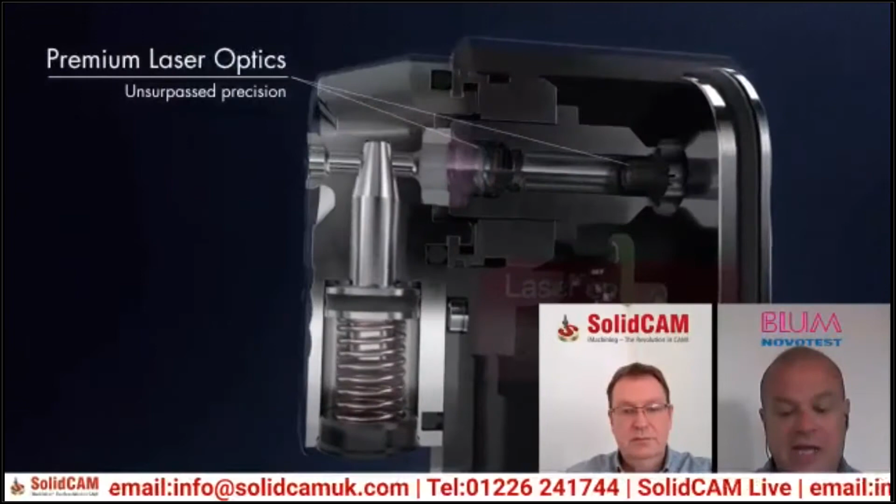The LC50 Digilog also has a smart dock that has an integrated pneumatic system that enables very quick exchange of the laser for minimal downtime. The system also features a newly developed HPC high performance cleaning nozzle with 25% increased cleaning pressure to ensure no chip accumulation in the harshest of environments. In order to further enhance usability and reduce downtime, the shutter features a bayonet click mount, which makes it very quick and easy to service or replace.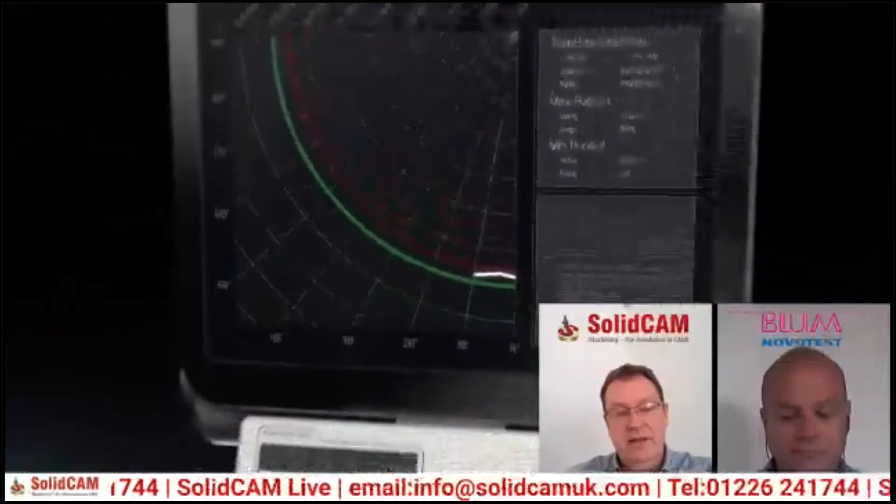That sounds really good. Is there a particular scenario where the LC50 Digilog system will be most beneficial? There are so many scenarios that can be beneficial to end users. If you have a requirement for highly accurate and precise measurement of the cutting tool to be done with the minimal amount of downtime, as well as being very robust and straightforward to use, then the LC50 Digilog will help drive productivity and reduce wastage. This could be at a large automotive parts plant where time and minimal wastage are top priorities, or a small batch specialist CNC machine shop producing critical parts for the medical industry. The LC50 Digilog is highly flexible to service many markets.

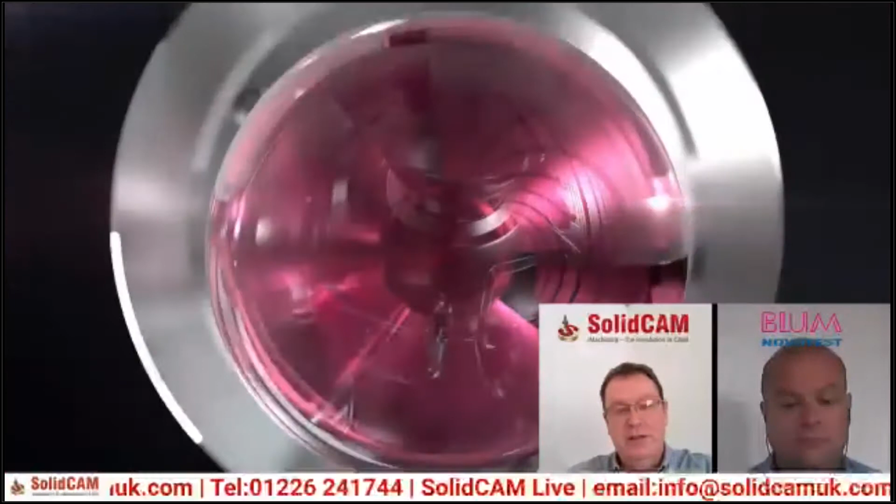Fantastic. Are there any particular machine requirements in order to fully integrate the LC Digilog? Yes, in order for the laser system to be in full Digilog mode, the machine must have an Ethernet capability, Profibus, Profinet, or EtherCAT. If this is not activated, then the system will operate in digital NT mode only, checking for tool breakage. The necessary Ethernet backbone can be added by the OEM if necessary. Blum have many years of experience retrofitting probes to machines, and we will undertake a full engineering survey of the machine prior to any installation, where we can anticipate any other requirements that are needed.

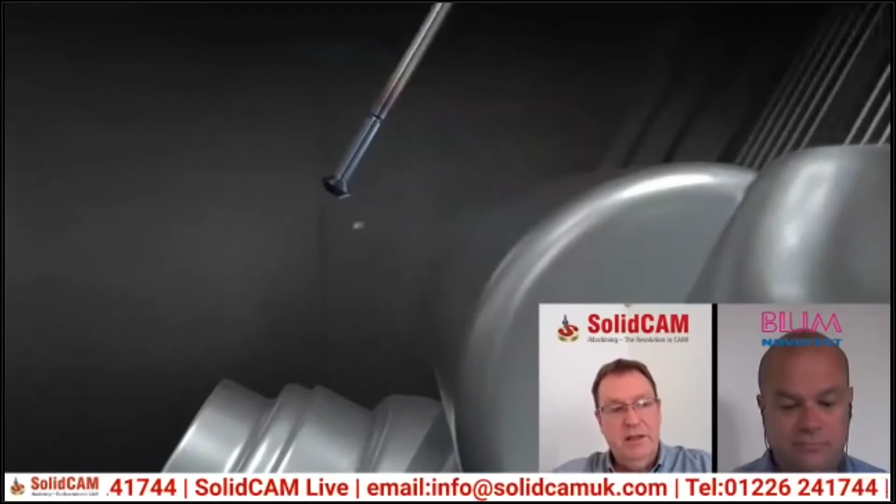That's cool. And is there any kind of particular training and support that you offer once it's all been installed? Yes, Blum will fully support you from pre-sales through to installation and aftercare. We will initially provide a budgetary price for the LC50 Digilog, and then we will undertake a full engineering survey of the machine, either at the OEM or end user's premises. We will work with the customer to ensure that downtime is kept to an absolute minimum throughout the installation process.

Following the installation and setup of the system, Blum will provide full training to the operators on how to get the best from the system. We believe that this is a critical and ongoing process. Also, our engineers are fully contactable directly over the phone or email should there be any ongoing inquiries. Blum also offers service packages to ensure that the optics are fully cleaned and functioning normally, even in the toughest of machine environments. Sounds brilliant.

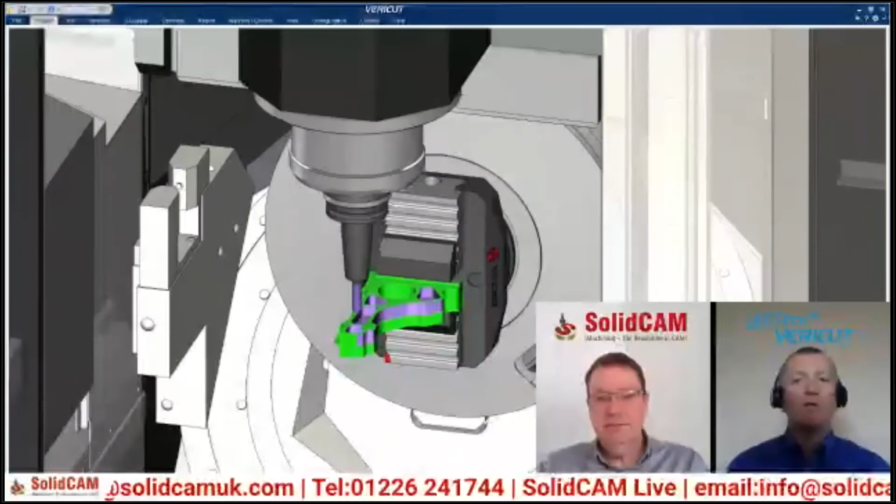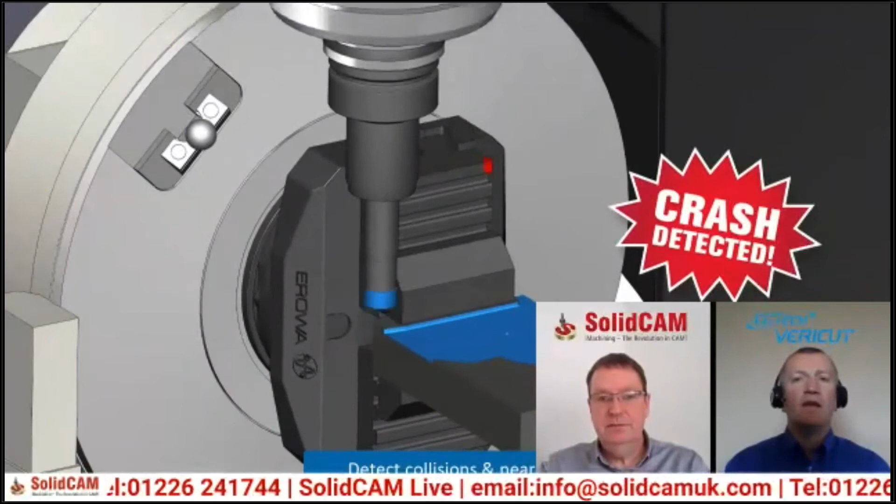We welcome that. Yeah, so we launched VeriCut version 9.1 towards the back end of June. There's obviously enhancements. Optimization, we've made that a lot more user-friendly and easier to use. Anybody can, through a few button clicks, start seeing the benefits of optimizing your existing NC code. So that's one big push for us, to make it very much a package of software that anybody can pick up and run with. We've also got the multi-channel additional functionality now, so you can optimize a machine with multi-channels.

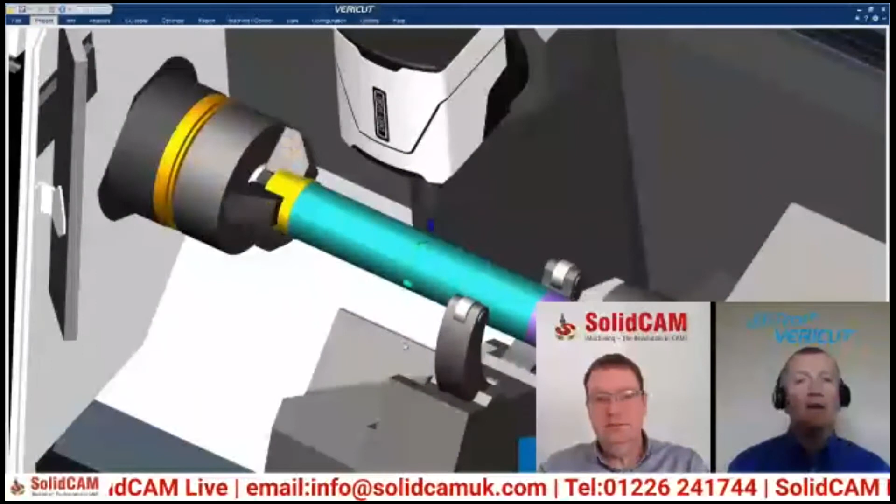We've also got the multi-tool station support on like Swiss type machines or mill turns, that sort of thing. There's annotated images, which is an enhancement to version 9, and we've also got enhancements to our AM offering. And certain subtle differences as well when you're wanting to look at the component visibility, if you like. So that's all available to our customers now. Like I said, we launched that back end of June, so people are seeing the benefits of that already.

That's brilliant. We understand obviously that VeriCut as a product is very much involved with the blue chip industries, and has become an industry standard within the big aerospace and motorsport companies. Is there something that VeriCut or CG Tech offer to encourage small to medium companies to be able to gain those benefits that the blue chip companies are getting?

Yeah, absolutely, Ian. We don't promote the fact, but there's something called single platform, which is designed to enable SMEs or people that have not dared to dip their toe in the water, if you like, or they've just purchased a brand new 5-axis machine and they're a bit wary of it. We can focus on their critical machines so they can start seeing the benefits of VeriCut at a more cost-effective rate, for want of a better description.

Get familiar with the product, start seeing the benefits, and then you could roll it across the shop if needs be, or just focus on those one or two machines that you've got that are of a concern to you, when you're avoiding bumps or certainly minimizing prove-out on those machines to make them more effective.

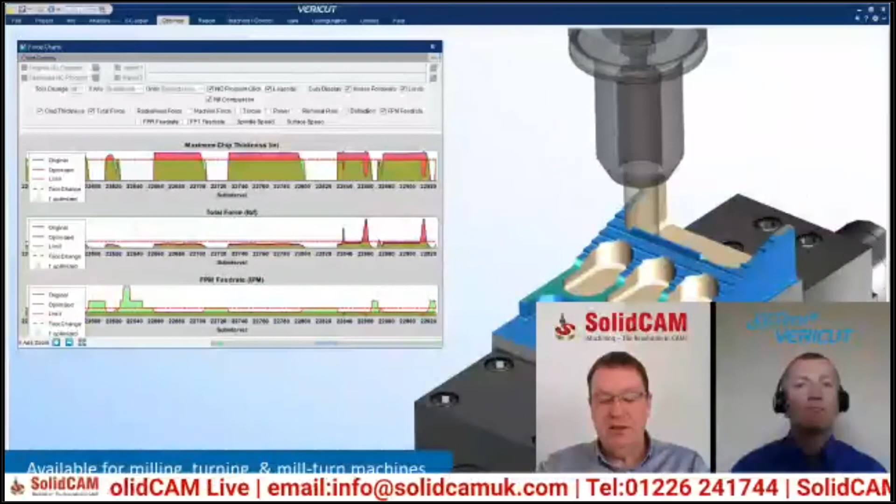Yeah, that's quite an important point, isn't it? People who are investing in new 5-axis technology need to make sure that with all these axes moving and you've got fixturing and tooling, there are no collisions. And with the best will in the world, any CAM system will try and produce the best quality code, but VeriCut actually shows the G-code simulation, doesn't it? Rather than the actual CAM platform.

Yeah. We're not looking at CL data, Ian. We're looking at the actual G-code that gets sent to the machine, and that's often where prospects pick the phone up. They've just bought that expensive 5-axis machine. They certainly don't want to have a bump on it, and they want to minimise the prove out of it. They want to make it as effective as possible.

So that's one of the conversations we often have, and hopefully we have that conversation before somebody does have a bump, because that is another scenario that we often come across. Yeah, I suppose if somebody does invest in a single platform, it's probably quite easy to tell them where the cost savings are going to come from. Can you just explain a little bit about where you see the main benefits and cost savings that come from using Vericut? Yeah, without a doubt, Ian.

So the main ones, if you like, avoid that prove out, avoid the person stood on the machine proving out that NC code, and obviously that's just downtime. But one biggie is obviously avoiding that bump, because we all know that if you bump a machine, irrelevant of whether it's small or big, it is going to cost you a lot of money, and it's that downtime as well. You've invested in that piece of equipment. You want it to be churning parts out right from the get-go.

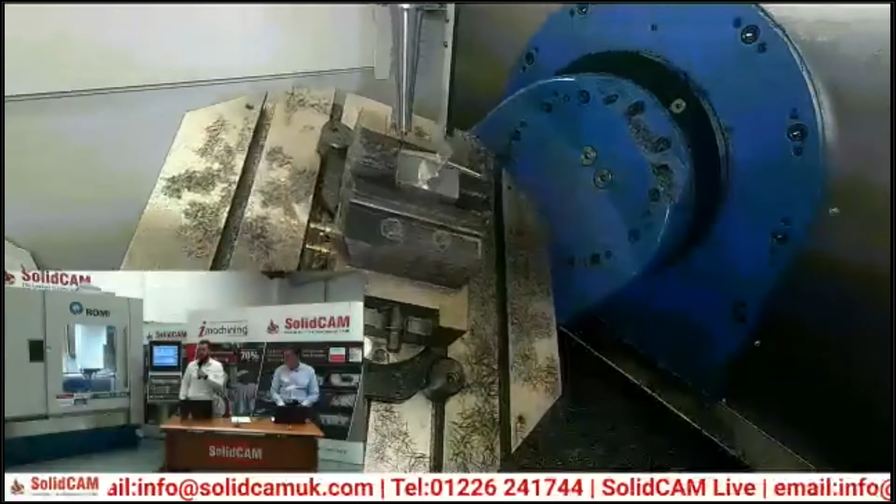Okay, we've got a question about what the controller is on the machine. Yeah, so the controller on this machine is the Siemens 840D. So it's pretty similar to the D1000. That's got the Siemens 828D on there. I do believe Romi offer a FANUC controller with some of their machines as well, but predominantly they come with the Siemens control. Quite a nice control to use, nice and easy, user-friendly. And as I said before, it's got the full simulation on there as well of the machine.

You can see the ball nose is finished with that logo now. It's just cranked over, so you can see I'm at an angle to that plinth face there. I'm not square on at it. Tipped over, so I'm using the edge of that ball. Does it matter to SolidCAM what the machine and the controller is?

Not particularly, no. We can create a post processor for any machine, any controller. Doesn't really matter to us. Like I say, we supply sample code and we can write the post processors for these machines and to suit any controller, really.

Going back to, there's another question here regarding SolidWorks and SolidCAM and what model types it supports. So you can import step files, x_t files. Obviously, you can open the SolidWorks files. You can even open Inventor files in SolidWorks as well. So you can open Solid Edge files and things like that. There's all sorts of import options in SolidWorks to be able to use them in CAM.

We can also cut STL models as well. So we can actually import the raw STL and just lay toolpath down on the STL model. It doesn't take much for us to be able to do that. We have a module inside SolidCAM for that ability. Any more questions from your side?

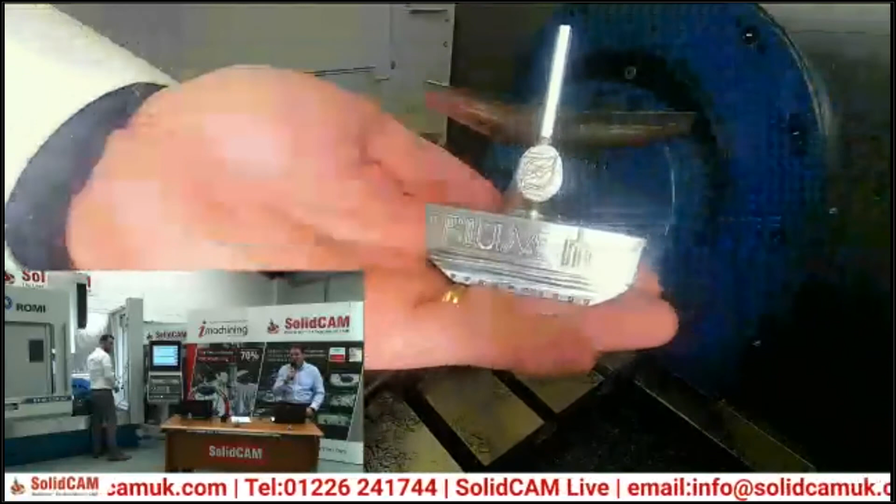The biggest thing we wanted to show today was that by using barrel cutters and being able to take a 2.5 mil step down, you're achieving the same finish as if you were taking a 0.1 step with a ball nose cutter. So there we go with the logos on as well. Great looking part, mate. Yeah, so as you can see, the part's finished there.

We'll switch to the main shot of us now. So that's the part complete. You can see the finish on there. Like Ian says, I did a large step over with the ball nose just to save a bit of time on this webinar. So the finish is not at its best there, but we wanted to demonstrate the barrel cutting and the finish you can get with the barrel cutters rather than using the ball nose.